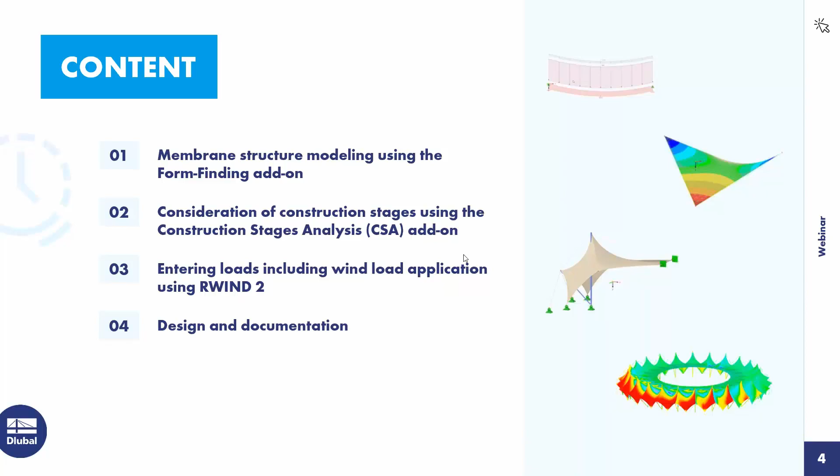Okay, thank you, Andreas. I take over and start with the technical part of our webinar. Today I want to show you how we can deal with membrane structures in our new generation, RFEM 6. For this we planned four main points we want to show you.

First, how you can model form-found shapes and work with them in the program. Then how we can organize these shapes relative to each other with stages. Third, how we can create wind loads according to CFD analysis on the structure. And finally, how you can design and document such types of structures.

Of course I can't do this completely for one project in one hour, but I want to give you an idea how this works. You see on the right side some pictures from top to bottom.

Because the new generation has a new input concept for these tools, I want to explain it on a simple example with a cable at first. Then we go to a hypersail surface structure, and afterwards we use all these functions on a more complex structure, a stadium segment, and finally we take care of wind simulation on the complete stadium model, which you see at the bottom.

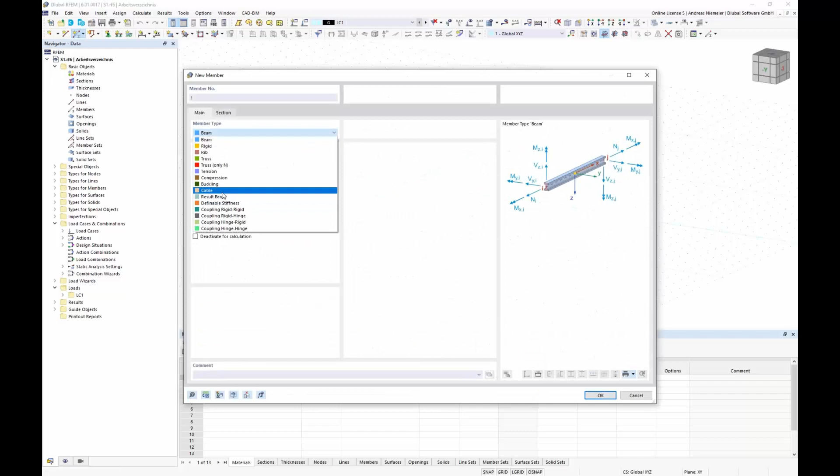As mentioned, we will explain all new features on a small, easy example. I selected a cable example, so let's model it. I use a new member type, cable, with a cable cross section.

Let's select one from the library, for example this PE cable with a PE material, cable material with the equivalent stiffness, and define here a cable with a length of 10 meters between 2 points. So that the cable will not fly through the air, we of course have to define some boundary conditions, so I define 2 supports.

Now this is the input for the model, a simple cable, and on this structure we'll explain all the features. Of course, what I always do when I explain form finding, I calculate the deflection of this easy example.

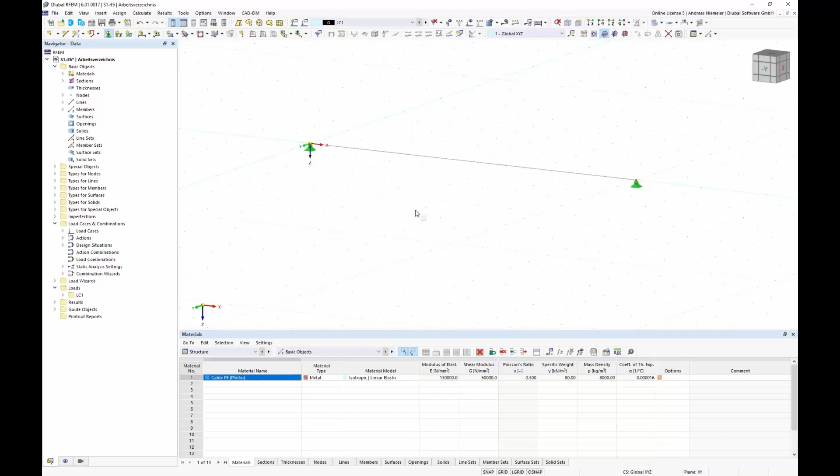Let's calculate the self-weight load case, which is always defined automatically in our program. If we run the analysis of this load case, we will get from the program, as expected, a deflection curve. Here you see 66 millimeters of sag.

Of course we can deform the sag manually, or let's say scale it. We can animate it, and when I scale it to 1, you will see that the deflection curve will lie on the topology shape.

This is maybe the first point I want to mention. In our new generation we have programmed an intelligence that draws the topology, the cable structure in this case, on the deformed shape, in this case with a sag of 66 millimeters.

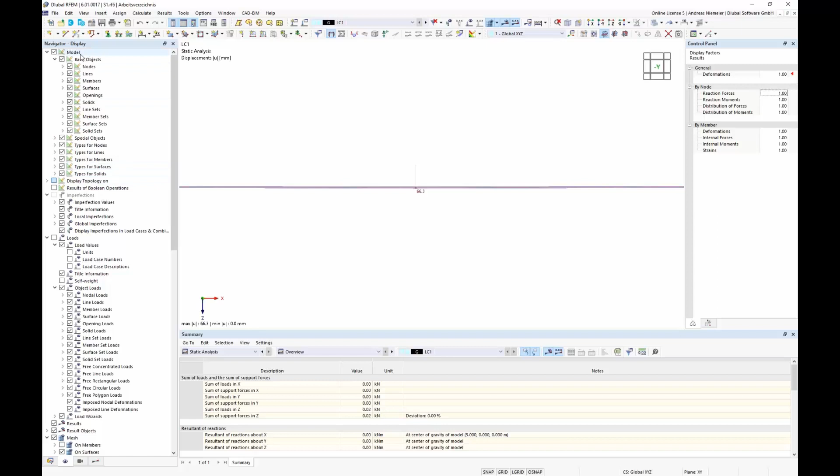You can change this in the display navigator below the chapter model, showing topology on original shape and deformed shape. The same can be changed here with this button, original and deformed shape. So this is a small change that should help understand the model a little better.

Next topic: of course we calculated now the static analysis with the length of a cable of 10 meters and for the self-weight of the cable itself, which ended up in a 66 millimeter deflection with an internal force of maybe 0.33 kilonewtons. But of course it's a too small cable moment.

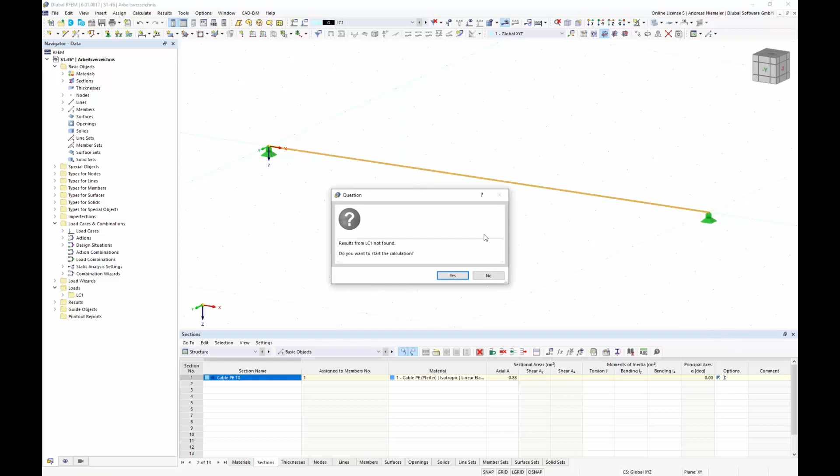Let's make now, because to show you the effects I expect a bigger force here. Yes, 1.25. But of course if you see the force here, you could say I want to simulate in the program a cable with a longer length so that I can reduce the normal axis force here. And this is possible with our form finding application.

For this you have to define, besides the self-weight load case, a pre-stress load case. I call it P and define here an action category pre-stress. This is now the step in our form finding tools. This pre-stress load case is empty and should be filled with some boundary conditions, which we can fill with the boundary condition for form finding.

We can go to the member loads, to load type, form finding, and define here, for example, a geometric definition that we expect for a specific load a sag or a cable length of, let's say, 0.2 meters. If we apply this load, it looks like a line load or whatever, and it indicates that we get 0.2 meter sag.

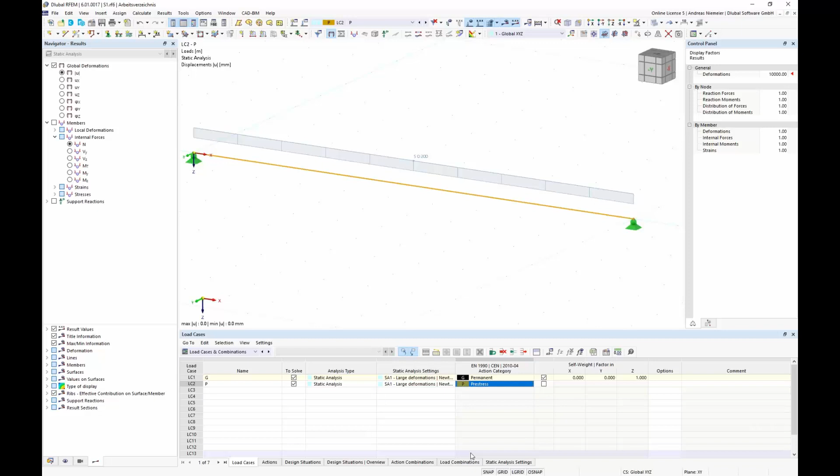If I say for this load, I have to go to the load combinations and define it. For this, I deactivated first the wizard and go to the load combination and say, please combine form finding with self-weight. This means for the program, because this combination 1 contains only this form finding pre-stress load case and any other load case, that this is a form finding job for him. If we run this analysis, the program searches a shape which fits to the conditions.

It means he searches a shape where he can fulfill almost this condition of 20 centimeters with a corresponding force. Of course, you see here we don't meet the target completely. We have 213 millimeters and not 200, but this is a cause of accuracy, maybe the standard definition for a specific size of model. If you want a more certain result, you can change the properties of the calculation.

This leads me to the next feature, how this is organized in RFEM 6. We changed to the properties, and you saw we calculated CO1, and every load situation, maybe load combinations and load cases, have here a static analysis setting. This means I can assign to every analysis or load situation a set of calculation parameters, and these calculation parameters have also a form finding sheet where I can define these settings.

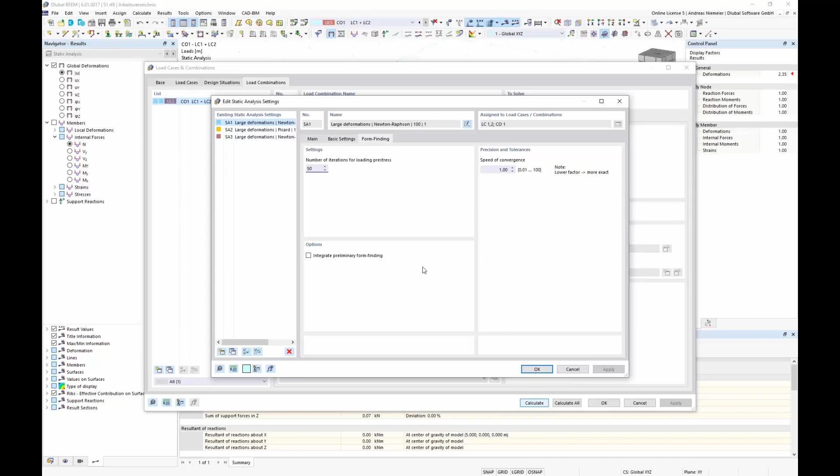You see there are fewer inputs. We simplified everything a little bit, and I increase now the pre-stress loadings to 50, and after confirmation and rerun we will get the 20 centimeters hopefully, and yes, we get it. So you see the program searched us the shape of 20 centimeters with a corresponding force of 0.4 kilonewton.

So far this was our first form finding job in RFEM 6. And maybe you saw now that we got, or we gave you as users, a new mighty power in the program to work with shapes.

In difference to our old solution, we can now manage more shapes in one model because I have it now in hand of combination. Before it was only one. This means now, if you imagine, this is shape 1, form finding 1 is G plus P.

And you say, I want to check in my model also another shape. Maybe the shape should base on a punctual load in the middle. So let's define a load. I call it N, and give this load case the type permanent. And define in the middle here a concentrated load with the size of 10 kilonewton in the middle of the beam and place it here exactly.

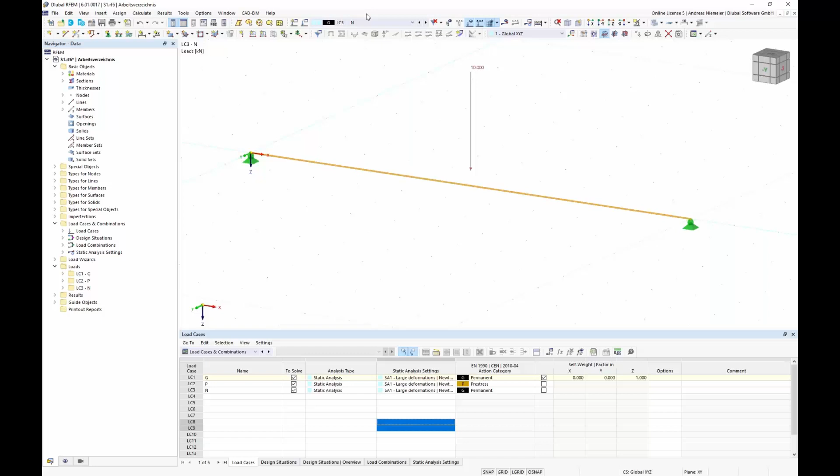Now let's create a second parallel shape besides this self-weight based shape. So I go again into this load case and combinations dialog, into load combinations, and create a shape, maybe FF2, based on N plus P. For this, we only have to change the input, so P and N, in difference to the first one.

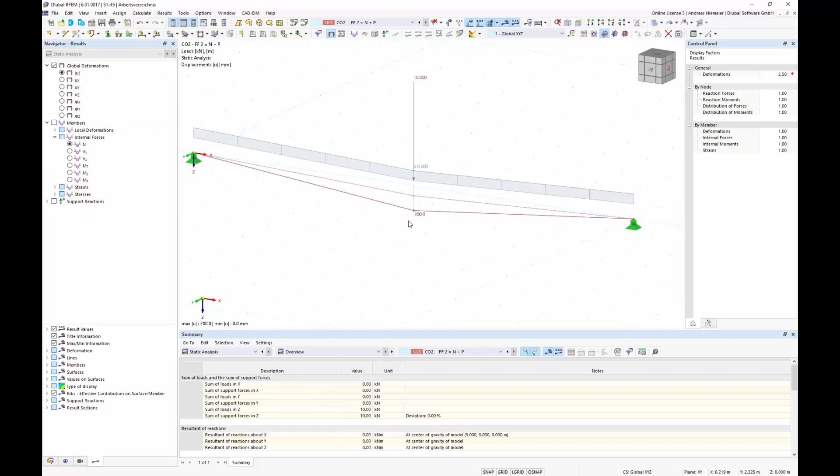And if we calculate this, you will see you can do in the same model another shape. What means we have the 200 millimeters in the middle, but if we take a closer look, according to this form finding load in the middle, this concentrated one, we get such a triangle shape with a corresponding force. And you can change in between both shapes. So this is now possible and gives you much more options to check your models or to create something new.

So this is one point what I want to show you. The next point was, and I remember too many questions on support, how I can deal with partial safety factors in the program. Do you have a solution for it? And with the new generation, we want to give you a solution.

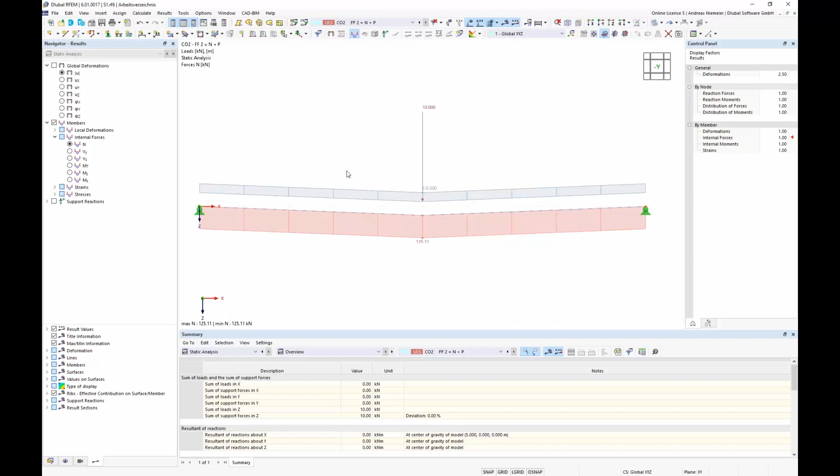So of course we can create a third shape. For example, I copy the first one and say let's scale it up and define here 1.35 as factor. And, that we have a clear name, 1.35g plus p. And if we calculate this, the program knows I have to do a form finding with the form finding condition of 20 centimeters.

It was not scaled up, but with a bigger surface weight load scaled with 1.35, therefore we get a little bigger force on the cable, not 0.4 but 0.56. And you see the program is ready for this.

Of course, we can also scale the pre-stress. What means if I scale the pre-stress 1.35, and only for the name here, 1.35 form 4, for example - this was form 3, only that we have a clear description - and calculate, then we can also scale the form finding inputs. You see not 200 and 270, what is the factor 1.35 in between, with the corresponding force again.

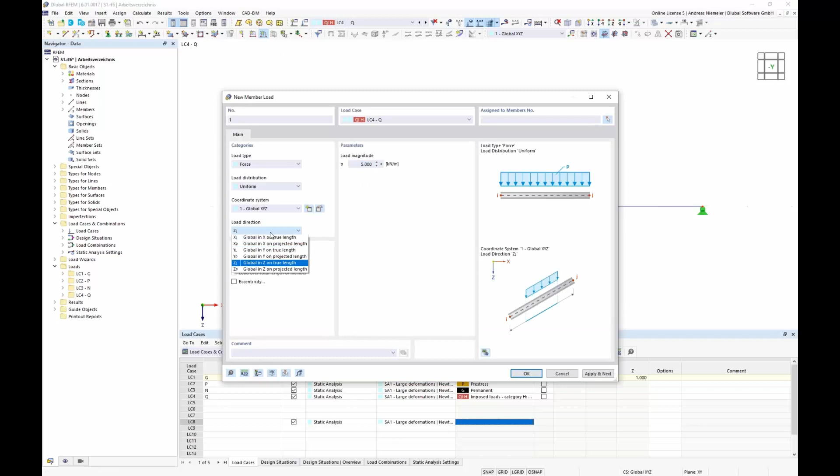So define at first some additional load. I define here, for example, a variable load with any category. Let's take this red one. Now, apply, for example, 5 kilonewton per meter on the structure here with a projected load. So far we have a load on structure. If I run this load, what happens? Without any further specification, the program applies this load on the 10 meter long cable, and not in any shape.

But if you want to apply it maybe on shape 1, you have to assign it. This means we go again into this dialog, load combinations, and say, please calculate - we give a name, Q on FF1. And this you can do if you define an initial condition or an initial state. So here you specify the shape, for example shape 1. This means we overtake the geometry of mesh and the inner forces, and to get a full set of calculation we apply also the outer loads.

Form finding loads and the expected additional load. And now, according to the situation that we have here defined an initial state as starting shape, the program knows that this is not a form finding job, only a pure static analysis job. Let's calculate this and take a look how this is looking. And you see, when we take a look at deflection, we have now a deflection of 629 millimeters, starting from the original shape.

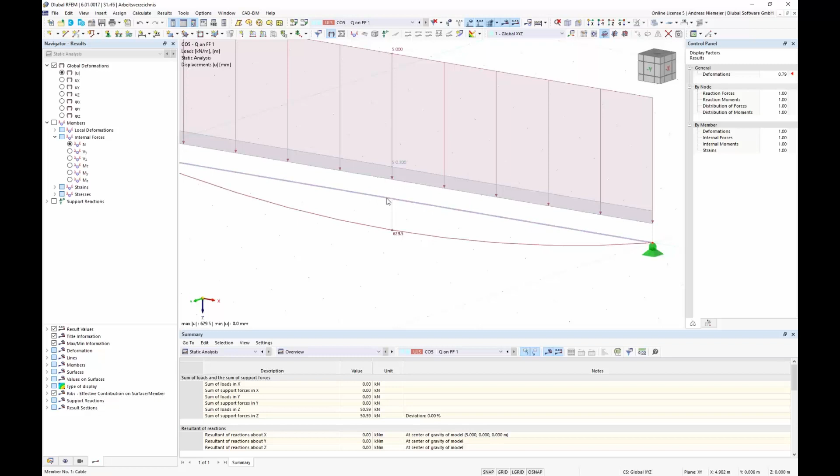So this is what we inputted. This is the shape of initial state. This is our form finding shape, and this is the deformed shape, the loaded form finding shape.

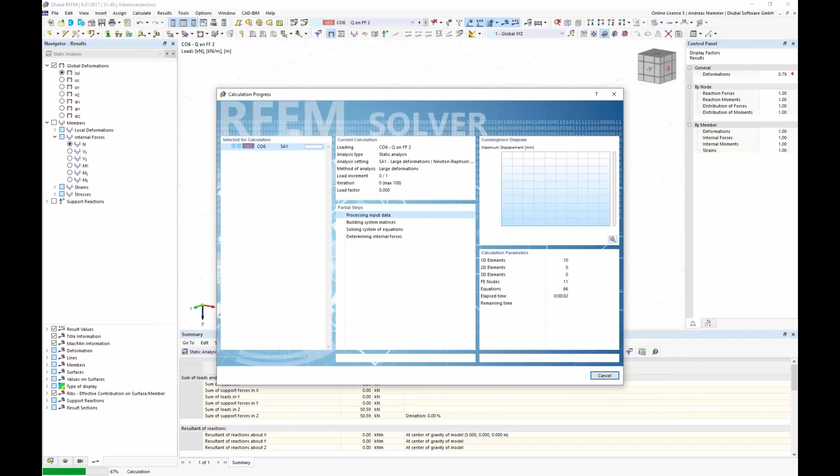The program gives you the option to manage all this stuff, and not only for one shape. If you wish, you can also apply the same load on shape 2, which means we only change here to shape 2 and exchange the load to N. With calculation we get the same task, but now on form finding shape 2 plus load on deformed shape, with 493 millimeters and a normal axial force of 177.

So this is our new philosophy of working with form finding tasks and organizing it in the program. This brings me to the next point: how we recommend the standard use of these tools. If you're starting a new project, you don't want to test it like I just showed you.

On a real project I recommend, and for this we create a new situation. I delete all this stuff, go back to load cases, and remove this. Now we have these 3 load cases: a standard situation.

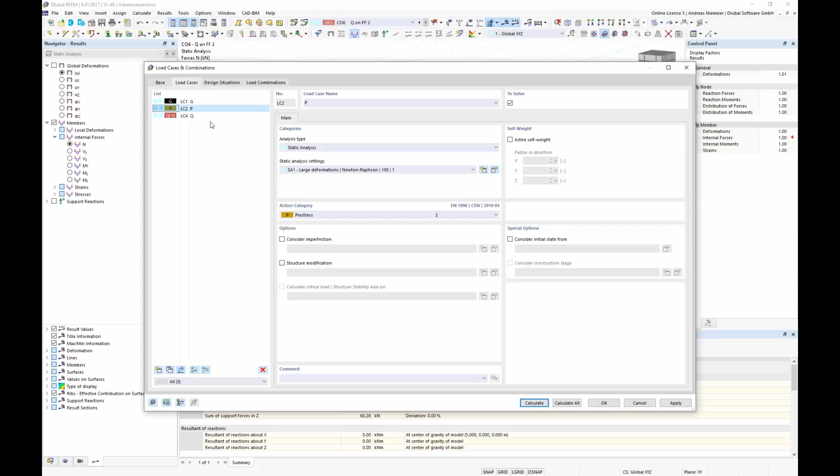In a standard situation I recommend that you use this with the combination wizard, and say: please combine all these load combinations automatically. This means the program takes over all this, but it has to know what my shape is. To define the shape for the program, we create it here as an individual load case.

So we select both, for example P and G, add it, and say this load case is shape 1. Now we give shape 1 the pre-stress load case.

Now you see we have 2 pre-stresses in it, but we only need 1. So I set my action, pre-stress, that this is shape, it's not needed, we only want a combination with P, and go to the design situations and tell our combination wizard: if you combine something, please always consider shape 1, or any other shape.

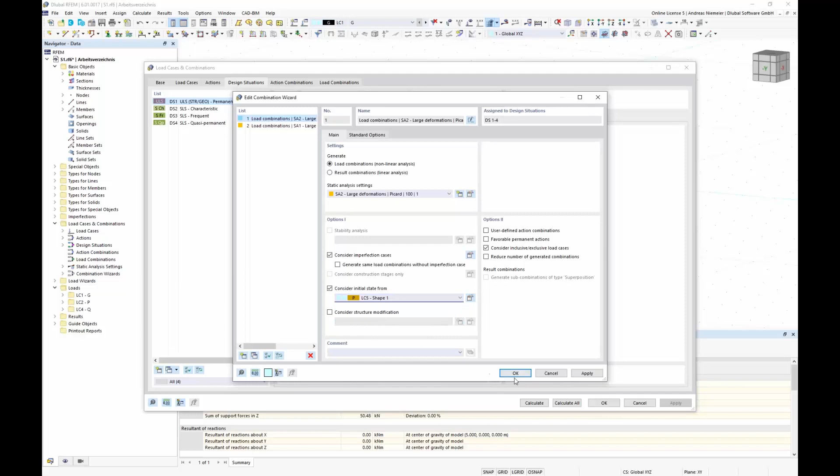Of course we have to use Picard so far. Now if we go to load combinations, you will see the program combines for us all combinations according to the rules of standards, so ULS and SLS with factors and without factors, and you see shape 1 is automatically assigned in all combinations.

And even here, all load cases, the external loads, are also placed in the combinations. With calculate all, you get all forces expected in this case. First it calculates the shapes, and then it sets it up.

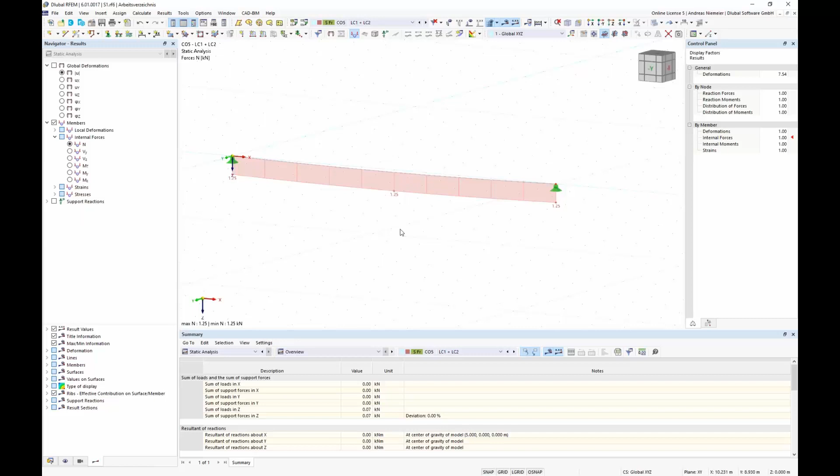So this is maybe the first introduction example showing you how to work with all these tools in RFEM 6. Of course this is a special example, because the shape for cables

depends always on the form finding condition, so how big is the sag, for example, plus any load for which we have to detect the shape, the self-weight for example. But there exist different examples. Maybe the next is here, a surface structure, a membrane structure.

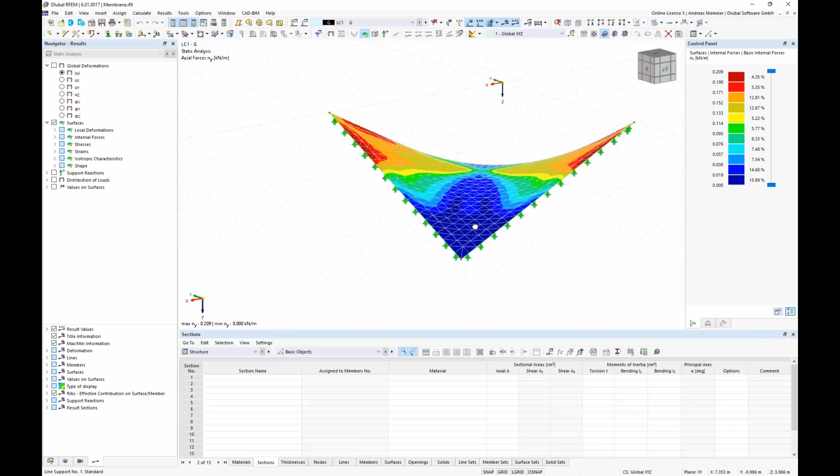I prepared this example only to show you it could also work like this. So in this case we have maybe such a sail with typical load cases: self-weight, pre-stress and snow load. For self-weight, that's the weight coming from the material itself.

For pre-stress, we defined here the inner pre-stress, the membrane tension, by a surface load, like we just did for members, with load type form finding, defined in X and in Y as 3 kilonewton per meter. And you see, if you run this form finding job, you get the shape of the membrane, with internal forces in the membrane that almost meet the defined 3 kilonewtons.

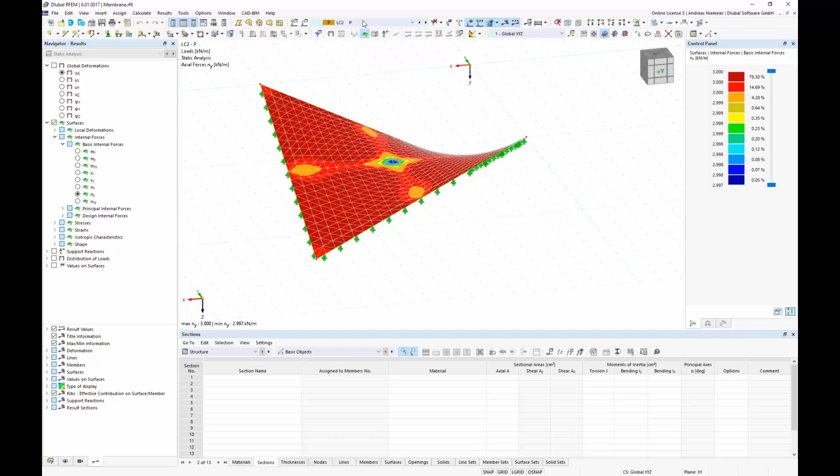If you want to combine all these 3 load cases in combinations as a standard recommendation, you go into the load case and combination menu, define the combination wizard setting, which is on by default, and set the wizard: please always assign the initial state, the shape from load case 2. Not more, in this case it's enough.

And if we go to load combinations, you see the program assigns us, even for this surface structure, this shape from load case 2. If we run the analysis, the program uses this shape and detects the forces. As you see, if we go maybe to the characteristic solution, we have here shape plus self-weight.

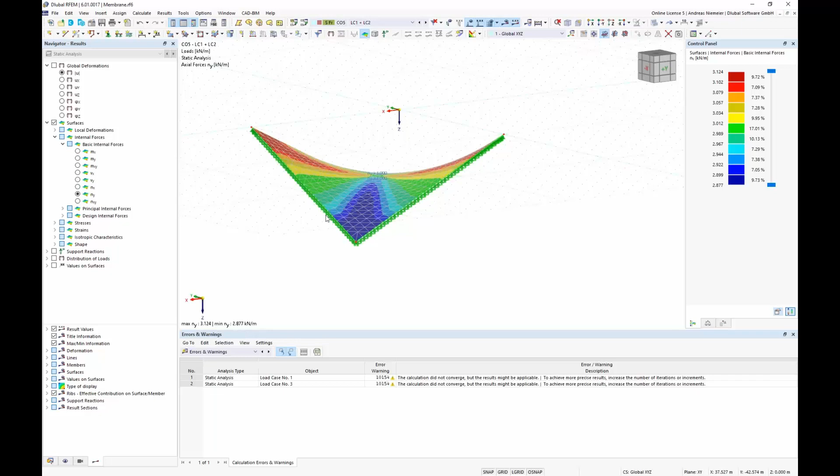It's not almost 3 because self-weight is applied afterwards. And if we apply the snow load too, you see the forces have bigger changes because the load has an effect on the given shape. So even this type of model is possible in the new environment.

And now we learned that we can use pre-stress load cases with form finding loads to find shapes, to organize shapes, to assign shapes to load situations. I want to go the next step and say it's even possible to use shapes based on another shapes. And if you have such a task, then you can also use RFEM 6 for it.

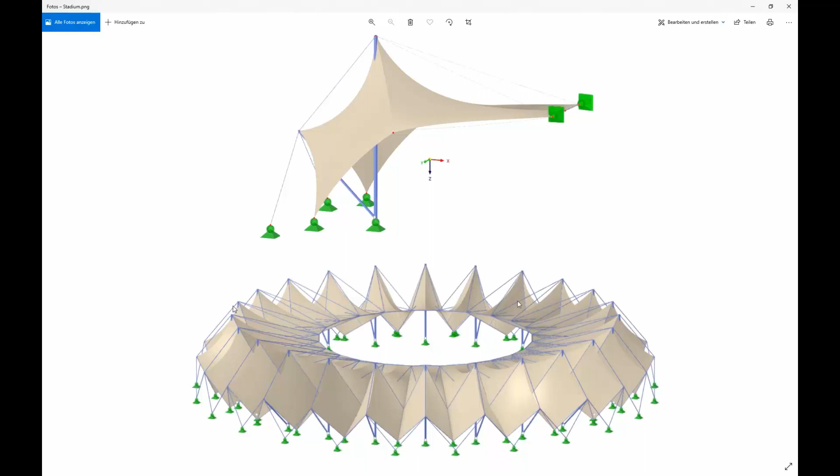We model this part, and afterwards we go into the stadium structure. So let's go back to RFEM and open a new model. I call it S2, and define all tasks what are needed for modeling this part of the stadium.

I go to add-ons and say please use form finding. And because we have these different stages, primary and secondary, I activate construction stages and go in. Of course it exists, so override it.

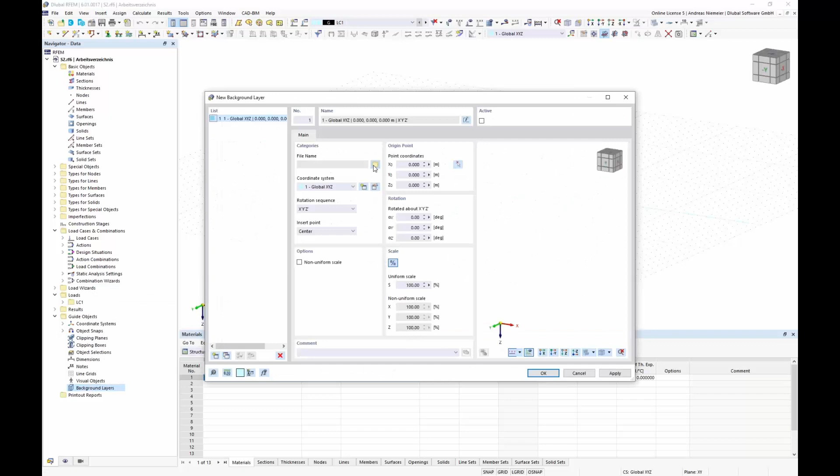Now let's start. Of course it's not easy to model a whole stadium or a fragment from it, so I prepared a DXF background layer. I go to background layers and import here a layer from a DXF file called base.

And you see this is my DXF data. It's on the wrong plane, so I rotate it 90 degrees and then by 180, and then everything fits and we can overtake it. Please take care that it's activated, so active, and now we have this basic geometry in our program. You see on the bottom there's a tribune only for imagination, and then you see here this main elements is for primary structure, and then the membrane for the secondary structure.

At first we model the primary, take a look, and then we add the secondary part. So let's start modeling these members. I go to the member dialog, member type beam.

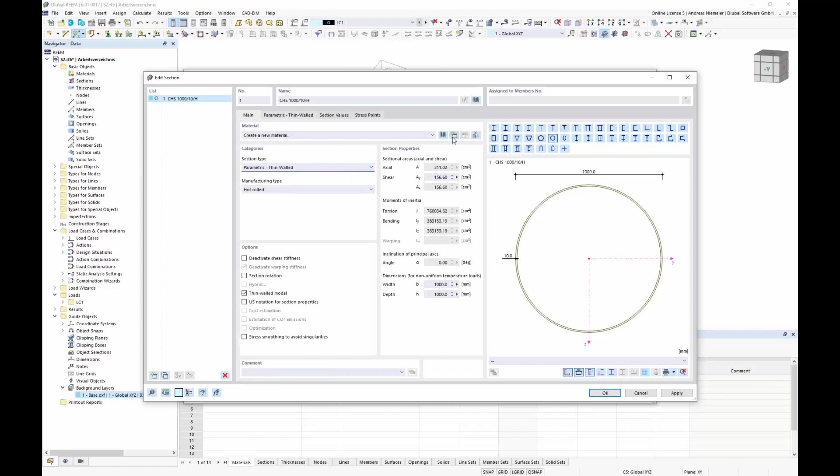Let's select a section. In my case here, because I don't move the section, my proposal is not the final state, but here I would select a diameter of, for example, 1000 millimeters with a thickness of 10, and a material of maybe S355.

So let's go to steel according to Eurocode. Select here standard according to Eurocode, this one, and select the steel here and go. And now we can place this column here in the structure, so from the bottom to the top.

And let's add here a bracing member what is connected hinged on the bottom, so if I activate the hinges, and here you have a different cross section, for example 600 millimeter diameter with a thickness of 10. Of course this could be optimized according to the section proof afterwards.

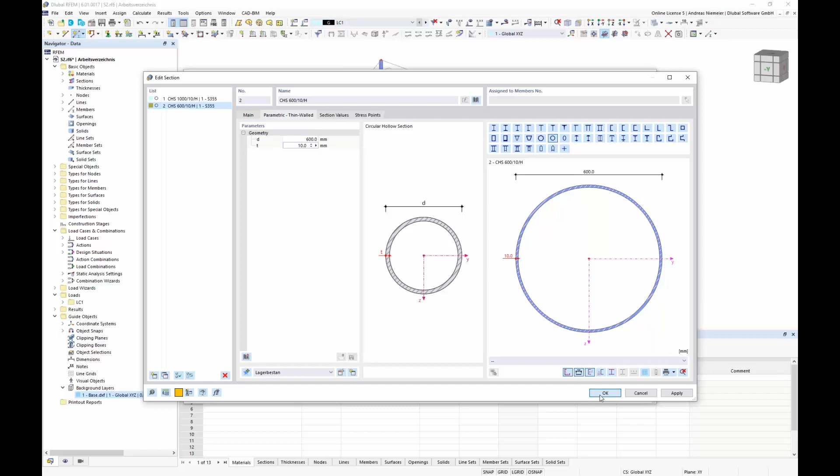So hinges should be hinged on the bottom, so define here hinges about Y and Z, and now we can place here the member between these 2 points.

This structure will not be stable, so we have to use now stay cables on it. The stay cables are acting now on the outer fraction of this segment. At the moment it's only a slice, but it will be a 15-degree segment, so we have to create it.

For this we need a center point of our structure. Because I know here the diameter of the structure is 288 meters, I copy this node 144 meters to the middle, and this is now my center for all rotations.

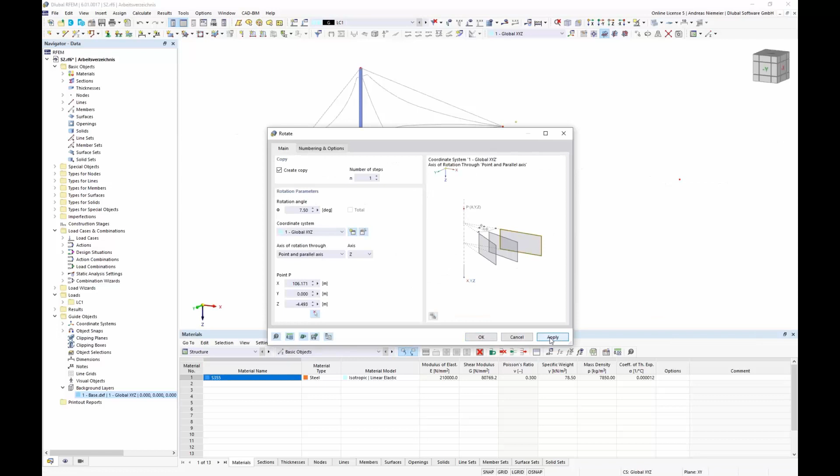And we can create from these nodes now the outer points for this segment. So I select these 3 nodes, rotate it by 7.5 degrees about the global Z-axis around this point, and apply, and now minus 15 degrees and OK. So now we get these outer nodes. When we take a top view, you see this is maybe the geometry of this 15-degree segment. And now we can place the cables, which means the uninteresting nodes we delete before.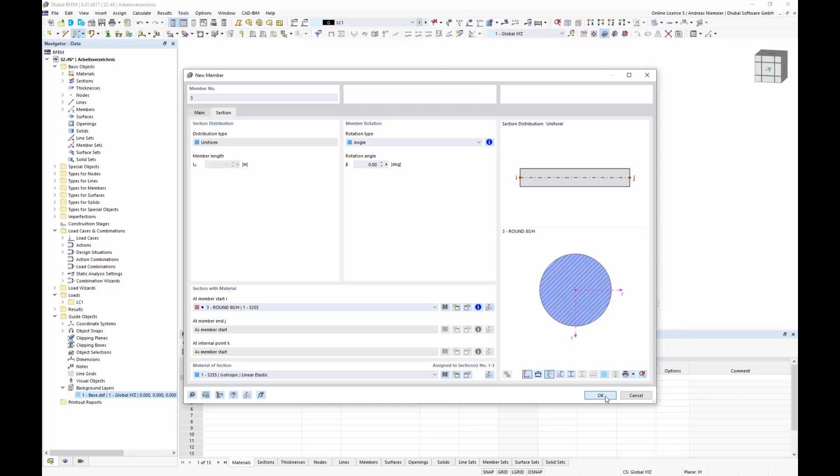Go to the new member function, use a cable, and now select equivalent sections with an equivalent stiffness. For example, here a solid section with a diameter of 80. So now we can place it here and here, and now to the top.

And now we need maybe some suspension cables to the front. Here we have a different diameter, so it's a cable at least. We use here a solid section again with a 30 millimeter diameter, and then we can connect maybe the peak point or top point with the front points, and maybe make some stabilizing cables back to the back bracing. So this is almost the primary structure for the stadium segment.

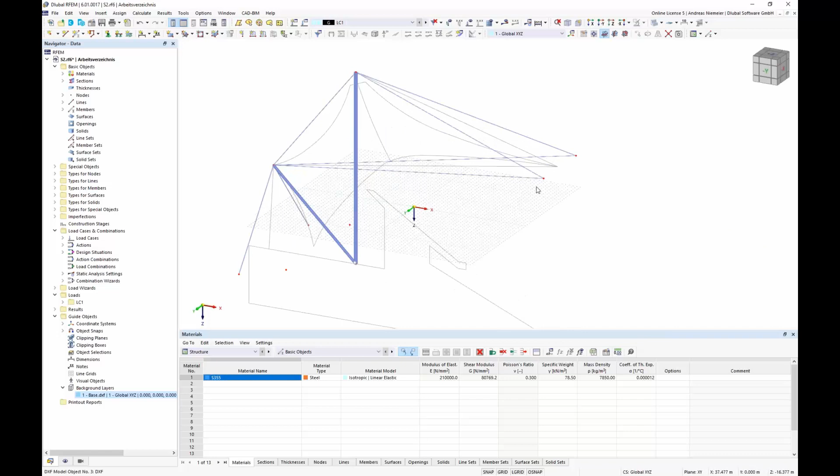The only thing that is missing is the tension ring around the structure. Let's add it. We take here a cable with a section, and maybe here need some more mass, for example 120 as equivalent section, and connect both points and directly define here a middle point, so divide the member for a later connection of the ridge cable. So this is now everything I have to define for members for the primary state.

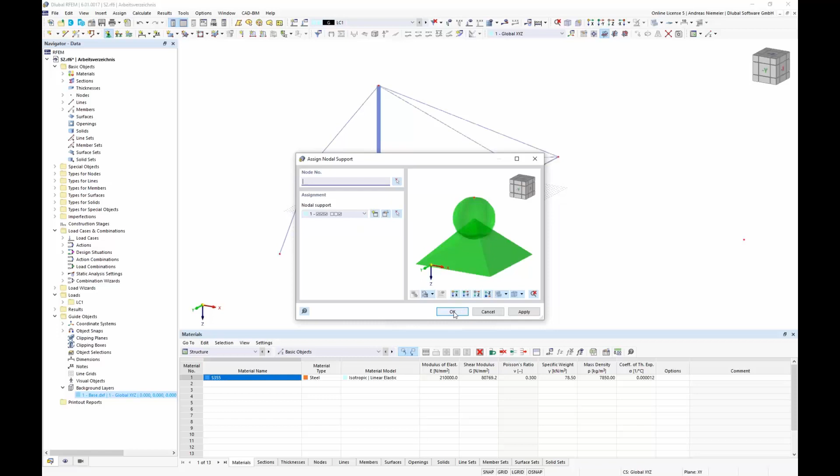We need a rotational symmetric boundary condition that is overtaking loads, so I have to simulate this tension ring around. For this I use also nodal supports, but I rotate them in the running direction of the cable, which means I fixate the degree of freedom in UY direction with a specific direction around 7.5 degrees.

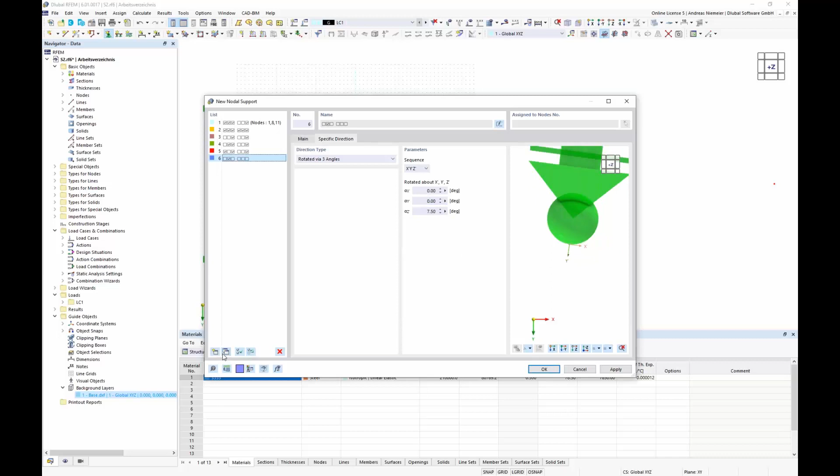Now let's copy it so we have it also for the other direction, with minus 7.5. And now we can start applying this support here, and the same for the last direction, and we get a structure that can simulate this tension ring. So the structure itself is now ready.

The only thing missing is the form finding conditions to find the right shape for this structure. And if we want to do something with form finding, we already learned we need a load case pre-stress. So this is G, permanent load case, and here we need a load case P, pre-stress, for defining these form finding conditions. So let's do it like this.

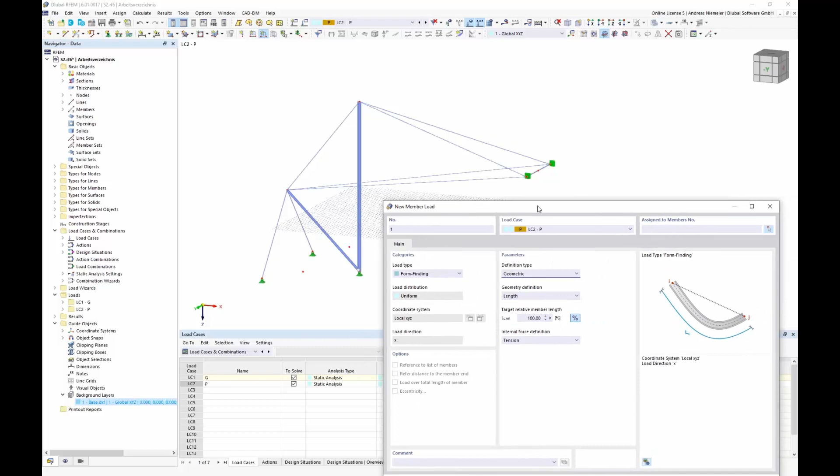This entry is done, and we define here with member loads, type form finding, geometric definition. You see we have different options here: geometric definition, force condition. But in our case, in this type, generally he should find a shape with the original length of the cable. So I define geometric length by 100% and apply this on all cables.

Now it's done, and now we should do a combination of both loads, because you have to find the shape according to the self weight, which is clear. We did this before with a load combination, but now we expect that we have a shape on another shape, so we have to organize shapes before, which we can do in the construction stages.

In the construction stages we can define now a stage, let's say shape 1, it's easier to understand, and we say shape 1 consists of members and nodal supports. The members, I draw a window about everything, okay, and the nodal supports the same. Everything good so far. So the amount of elements is clarified in this stage.

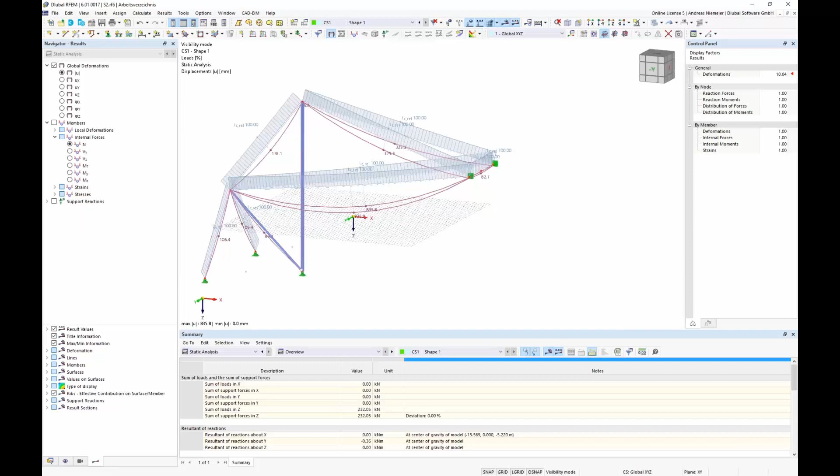The only thing missing is that the program knows it should do a form finding for this stage, shape 1, which means it should consider these load cases as permanent. And if we calculate this stage with this load selection, it's clear because nothing else is here, he can do a form finding for this type of structure. We get small sags, we get forces, so everything is clear so far.

The next point is to hang in the membrane, what I mentioned before. So if we take a look at the background layer and set it here, you see now we have to bring in the membrane on the already deflected and loaded shape 1. To do this, let's say delete mesh and start modeling the rest. That means we define, for example, the boundaries of the membrane.

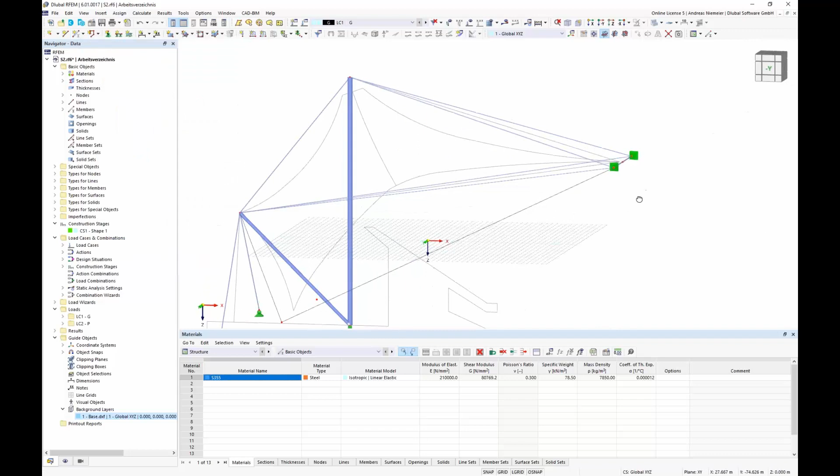It's maybe here, running to this point, and even from here to the top. The only problem is now that I have to specify that the cable is not running in the other one, so I rotate my grid point plane and use some arc lines to cover this.

I simplify this right now for this presentation and pick the line, same for this here. Of course, it's not important if this line matches the DXF shape, because the form finding application itself will find the right place of the structure. So it's not a target, it's only a tendency where it should go.

And now, not completely, we need here a splice cable, so also define here a splice. If we want to define it on the perpendicular point, we can do it like this. Now we can deactivate this shape.

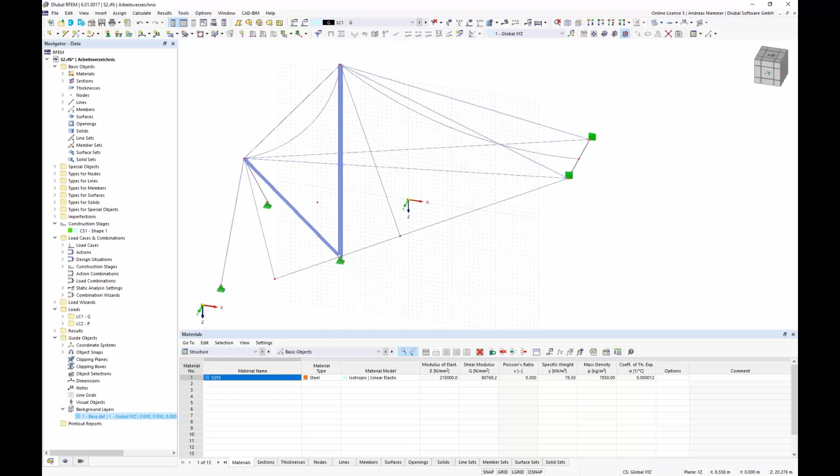You see we specified the boundaries for the membrane and can support cables on these boundaries. So I select all these lines, go into the library, edit lines, and say these lines should hold some members with the type cable, and now define the cross-section, for example one with 20 millimeters. So far it's good, and now we can maybe bring in some membranes in these cable boundaries.

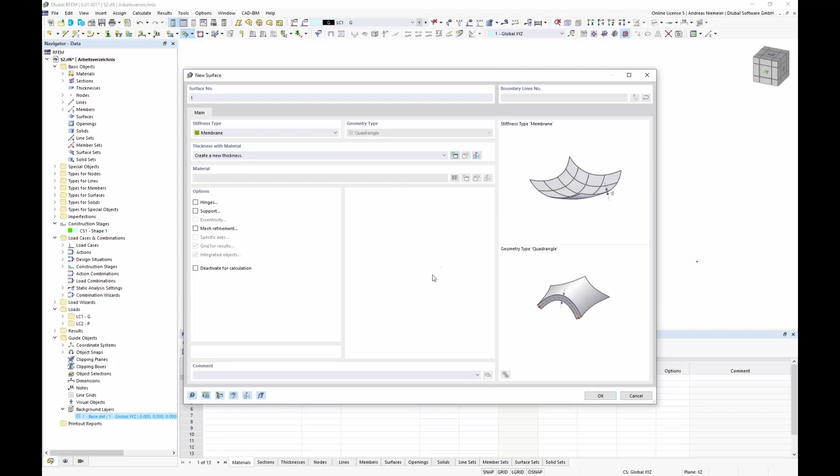Because this produces some non-plane surfaces, I select as initial shape a quadrangular surface with the type membrane, and go to the library. This is maybe new: in the library we now have defined fabric material, standard materials with an average set of values of stiffness. For example, we use here the glass PTFE type 3 option.

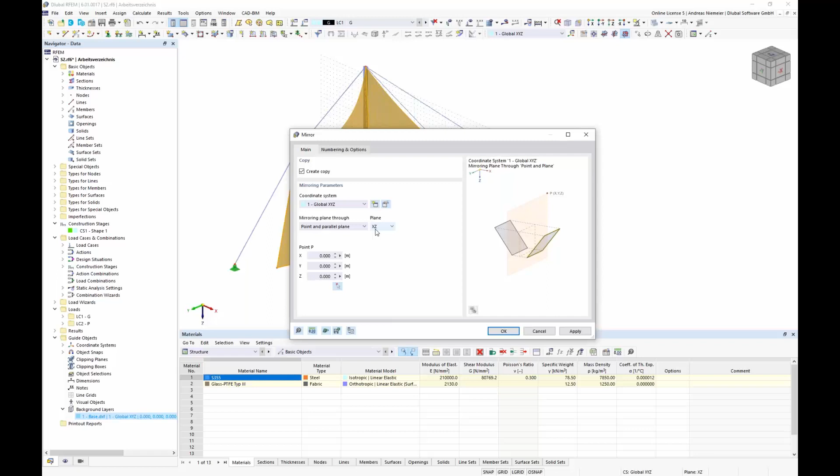The program knows, according to the defined stiffnesses, even the reference thickness of 1 millimeter here, and now we can place these surfaces in between these cable boundaries. If we take a look at the transparent view, you see the definition is now made, and now we only have to mirror this stuff on the other side. So use the mirror function, create a copy about the XZ plane in the middle, and go.

So all this is done, and now to finalize all this stuff we have to take care again about boundaries. One type of boundary is clear: we have to fixate these lower corners here, and we still have to check that the rotational symmetric support is working for this 15-degree segment. This means we have to support these boundary lines.

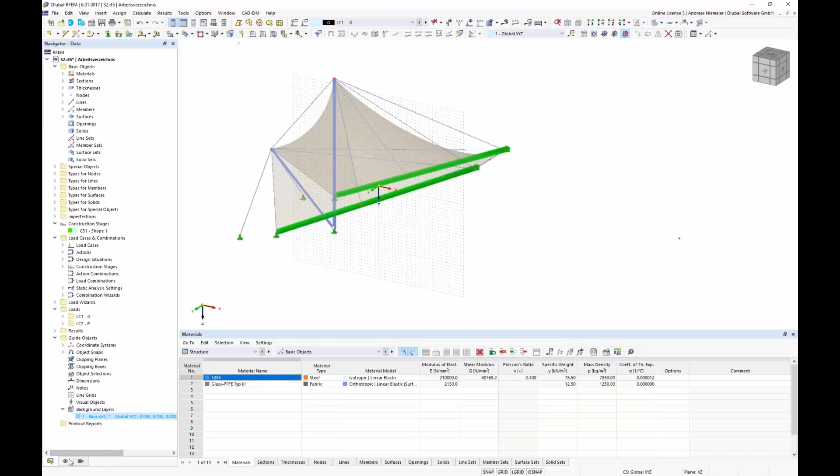So we use here line support on local axis in local y direction and pick these lines here. So far this is done. This is a fat green line, I don't like to see it all the time, therefore I deactivate it with type for lines in the display navigator. And now the last point is to specify even form finding topics.

So we want to pre-stress the membrane with a tension load. Let's go to surface load, type form finding, and we can define here the method of application, standard or projection, force or stress, and we say, for example, we have here 2 kilonewton in x and in y direction, and draw it above the model.

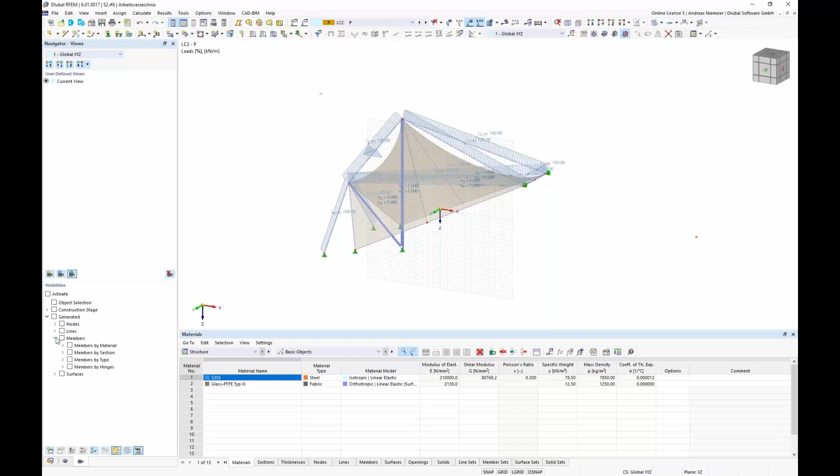So this is done, and now only the last final boundary cables are missing, and now I see so many loads I lost my overview. If you have the same situation, please go to visibilities, generated members by section, and activate the last one, and you see these members are left, and we can go to member load, form finding, and can select the definition.

So geometric you already saw, but we have also force options, and here you get also some more options for shapes. In RFEM 6 you now have the option to place an average force, maximum force, minimum force on member, horizontal tension component, a tension at start, at end, a minimum tension at start and end, force density. So there are more options than in the old program.

We use now average force with, for example, 100 kilonewtons, and draw this stuff over the structure, and you see the loads are set. So now loads are defined, boundaries are defined.

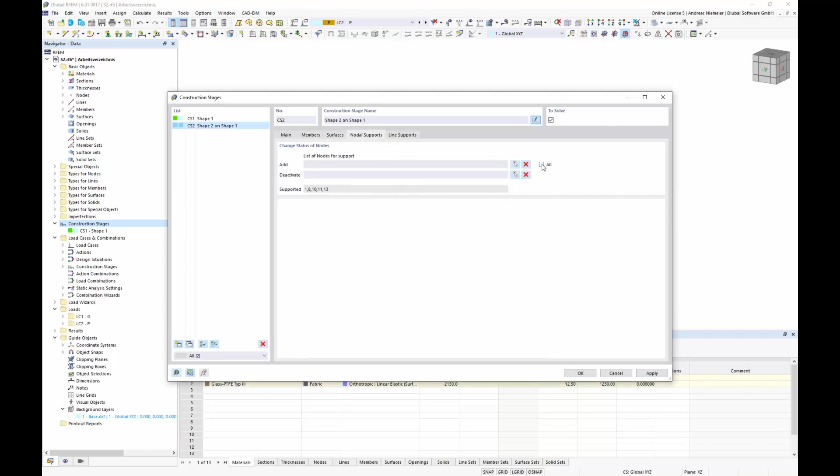The only thing missing now is that the program doesn't know what is my secondary state. So let's specify it in the stages and say here, please create a new stage, and we call it shape 2 on shape 1. And for this we say, okay, please consider also surfaces, please consider also line supports, and because we know no more elements will come, we say all, and all. So elements are clear.

So here we know which elements should be considered, and the program knows the loads automatically because stage 1 consists of self-weight and pre-stress, so it's a form-finding topic because it's permanent. The same applies for the second stage because it's permanent. So if we calculate stage 2 now, the program first has to detect stage 1 because it's the basis, and once it has stage 1 it calculates stage 2. So we have a sequence of shapes.

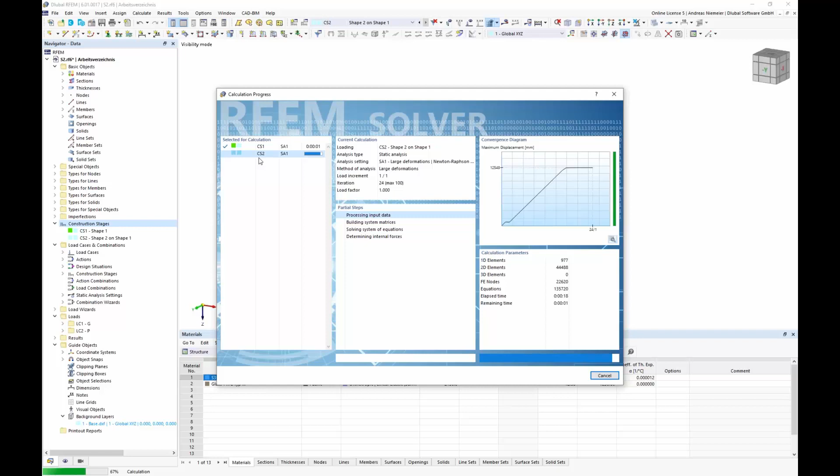This is quite a cool function, I'd say, and gives us much more potential to calculate a lot of structures. Now when the update is ready, you see the shape of the membrane based on the already defined shape 1 with a new set of forces. Of course you can see the forces in the membrane, forces in cables, and it's clear you can change back even to stage 1, which holds only the member structures, and you get only forces on these elements and not more. So there is a pure organization of which elements should be considered and which loads should be considered, and RFEM 6 keeps it open for your definition.

And now if we have a sequence of shapes, the question comes up: where do I apply my additional loads? Isn't that a weird situation, a chaos?

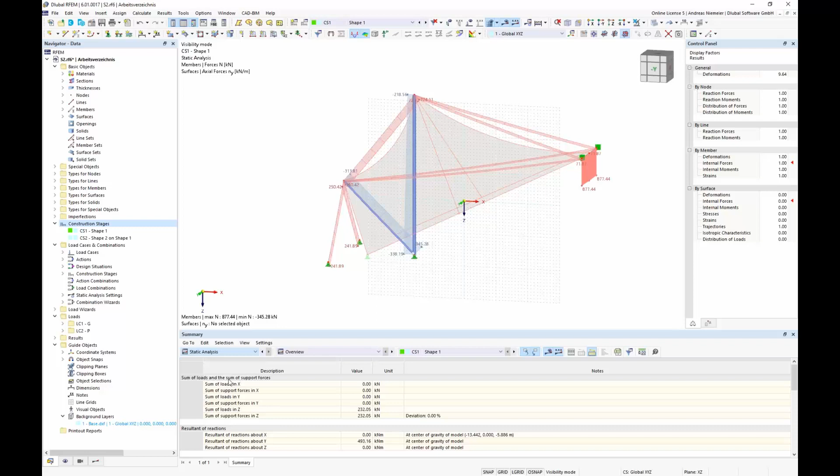No, it isn't. So let's create a live load, and define it here in the load list, for example a Q load, where we select this red one and apply it on the surfaces. So a surface load, force in projected area, maybe 0.2 kilonewtons. And we draw it over the structure, and you see it places the load above.

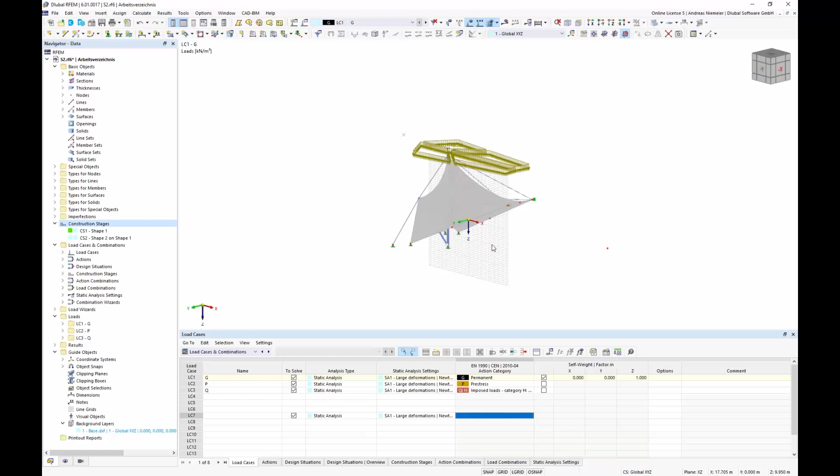The only question now is at which stage this load should be used. We have to go back into the load combination menu to these stages and say, we have to do something first. We have to give the program information about what is now the basis for further calculation. For this we create a last, final stage, and we call it structural calculation, calculation on shape 2. Now we can start assigning loads. This means shape 1 has a start condition, shape 2 is based on shape 1, and stage 3 is based on shape 2.

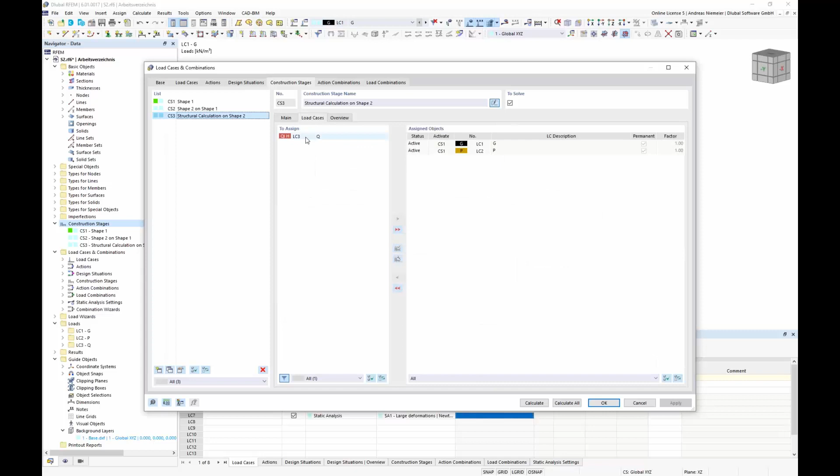And here we say, please consider load case 3, variable non-permanent, in your stage. Now let's say everything is done for calculation, and we pick load combination. The program prepares load combinations for ultimate limit state and for serviceability.

But if you take a closer look, the initial conditions, initial states are not defined, so this is not so good. But it's the same as for load cases - the program has to know for which stage. So let's go back and say, of course we want combinations for all stages.

And the wizard says, yes, I do it for stages only with the Newton-Raphson solver. If we go back to load combinations, the list is a little longer, but now has a stages allocation: stage 1, stage 2, stage 3. Here we have 2 combinations, the same for the characteristic ones. And as you see, we now have stage 2 defined as basis, working on the element set of stage 3, so this setting is pre-filled with all load cases.

Now we can start calculating all. Before that, I'd deactivate these load cases so we don't have to wait for all of them, and calculate simplified a bit. No, actually we can calculate all. So now the program is calculating all stages at the same time - to say it correctly, the program always calculates the load combinations for the stages that are already calculated. So it can't calculate the final combination which is based on a state that isn't prepared so far.

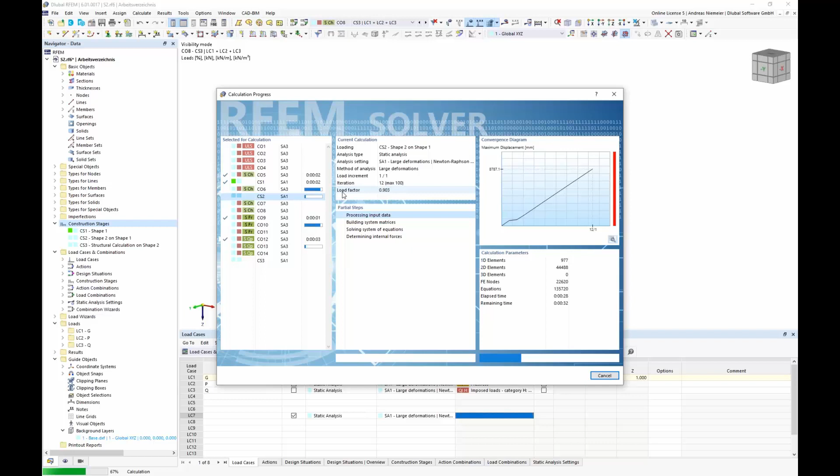So now we have to wait to get the analysis of these 14 load situations based on different statical systems. As you see, there are always 4 processes running on my computer at the same time. This is connected to a solver manager, because the program has intelligence which checks how many processors are available and shares all this calculation work among these processors to get results back, using all the available hardware possible. Of course, it cannot skip over stages in this case.

You can also select every process manually. Maybe combination 1 has a pretty small deflection, combination 2 has a bigger one because the membrane is moving from its origin place to the uplifted place, which is a longer way to go.

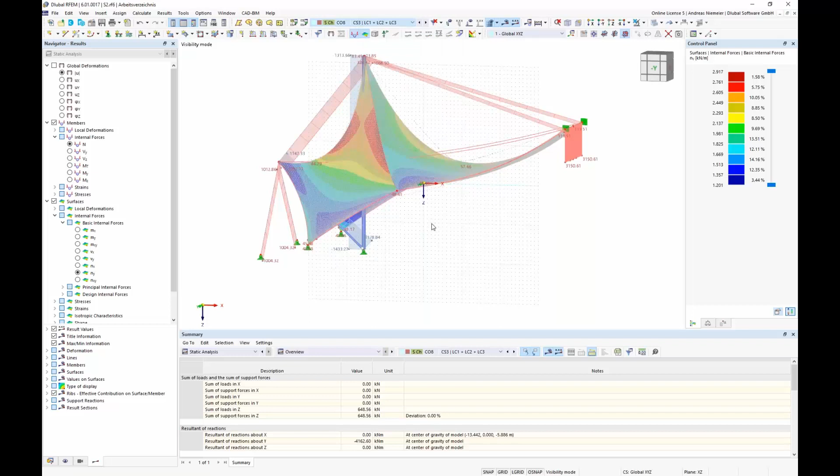Now the results are ready. You may see nothing according to so many loads, but let's open, for example, combination 3, which shows self weight and pre-stress in these different shapes. This is maybe a little bit scaled, but now you can select the different stages with the different situations.

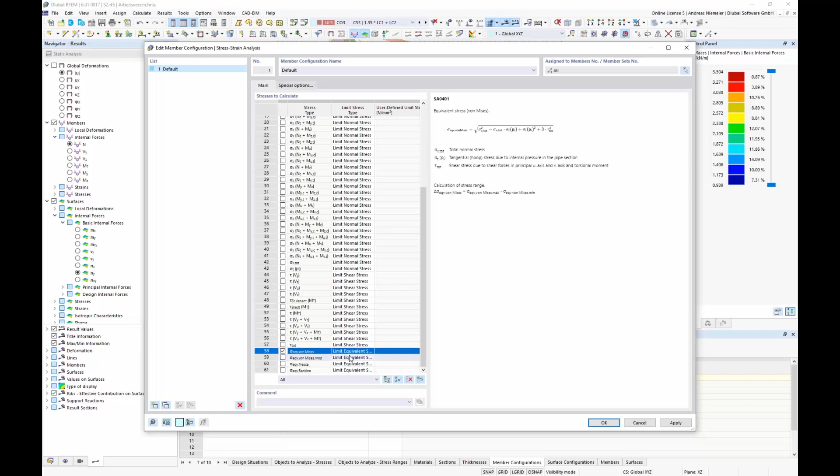This brings us to the stage of checking if the membrane and members are so far okay. For this you can activate in the calculation add-ons the stress strain analysis option, where you can say what should be calculated. For example, for members we say please check for us, and you can select between all these stress components - it's endless and maybe boring. So from my point of view, sigma equivalent is enough, check it against the limit equivalent stress, and apply.

For surfaces you also have the same option. Here equivalent stress is not so good, but you can say please check sigma x and y with a user-defined stress, for example 35, and here also use for example 25. It depends on you what the limit stress is.

Now if you run it, you get a utilization check for all these elements according to stresses coming from all these stages. So now we get a result.

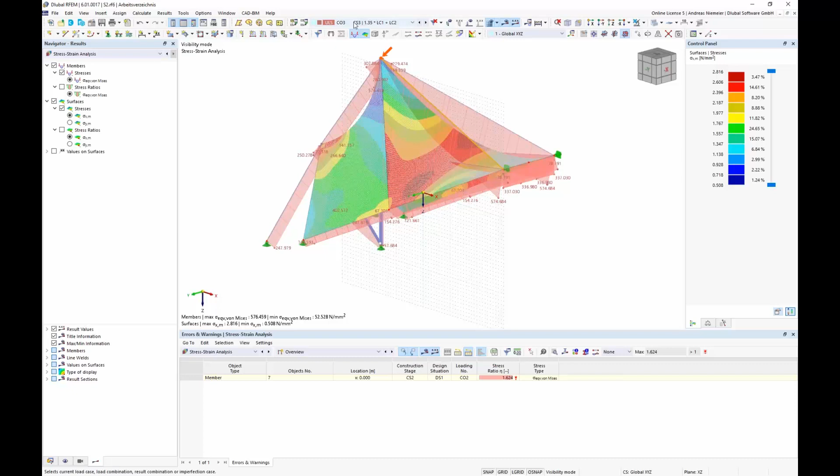Of course, now the nice shape of the form-found shape disappears because this is valid for all load combinations from different stages, so the program draws the shape on the original shape. But this is one point - now you see we get results for members and for surfaces.

Let's deactivate it first for surfaces, deactivate the stress ratios, hide the mesh, make a wireframe model, and you see, okay, almost all cables fit, the rest we have to rework. Here we have some red ones, so you need a bigger cross section.

This could be visualized, and you get also a result table on it - stresses on member, by stages, by design situation, or by section, where you get the table. This one is maybe the limit state for the different cross sections, for example.

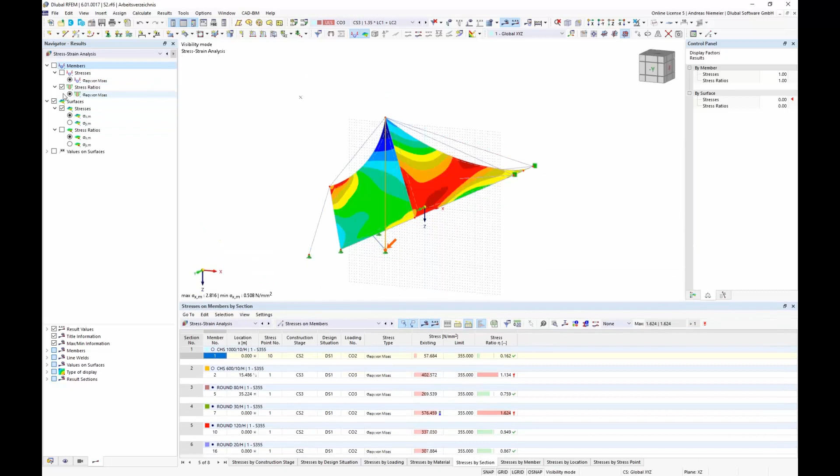The same for surfaces - here we have also utilization, and you see stresses on surfaces. So far the grid points are fine. Stresses by material, by thickness, by surface. You always get a table where the existing value is compared with the limit and get a check or not.

So far, now you see this is the way of design, and if you have to bring all this calculation onto paper, we offer in our program a printed report.

This printed report could be opened here, and of course at first you have to give a scope of what should be everything inside. Take a look, you get maybe all options - basic objects, node, materials. All these topics could be brought into the shape of a table, even the stress analysis we activated.

Here you can say error warnings are not interesting for surfaces. I want to document the table surface by surface number, save it, and show these tables.

Now the program creates a report where we get a sum-up of all input data according to the scope we just defined.

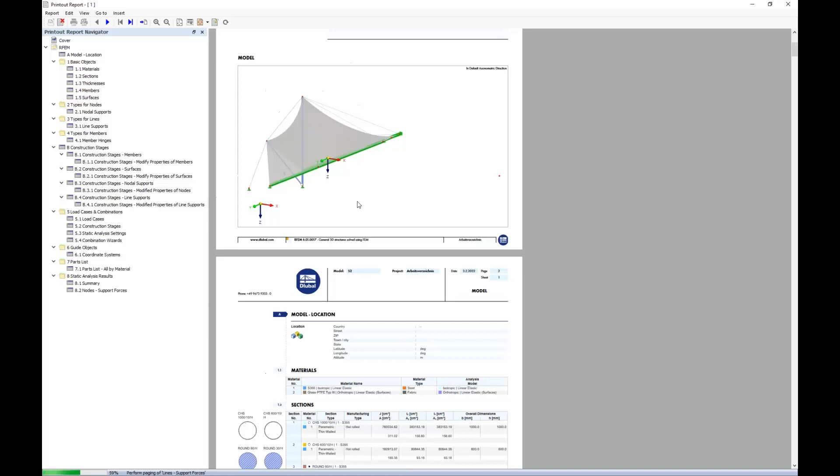It's a styled document where you see a cover, a content list, and also all data like sections and members visualized with nice small explaining pictures, so the reader of the document understands what is going on.

You can zoom it if needed, and of course the results we just looked at are defined here - so here's our list for cross sections for surfaces.

Even this list that we see in the main program could be visualized in this document, and if you are forced to make it more reader friendly, you can add also some pictures.

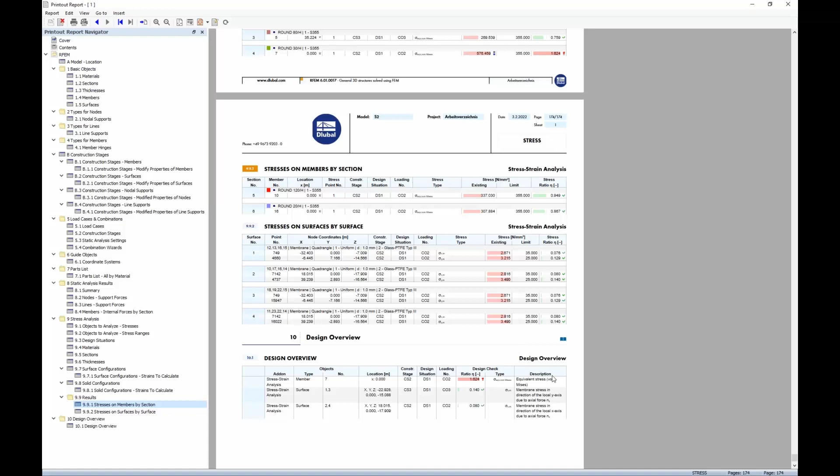So jump back - the menu is opened in parallel, and you can say please print me a picture of the member utilizations into the document, print that report, and say please make me a window-filling picture with a height of 50% of page height, and yeah, okay.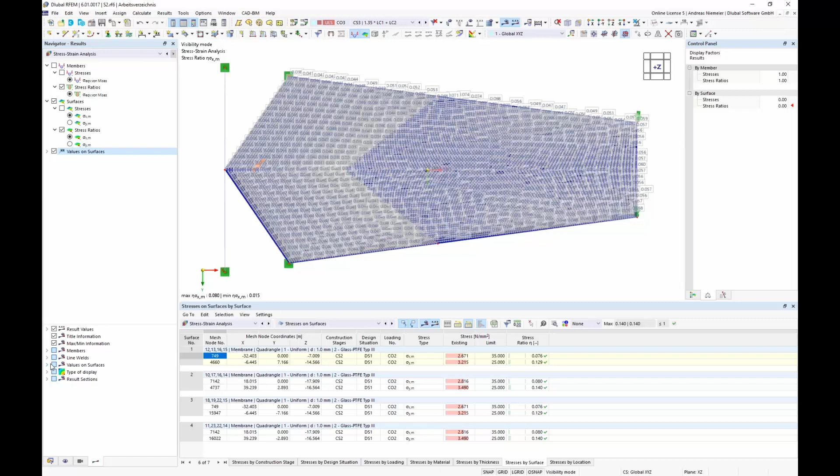Make me a utilization picture of the surface utilization from top view with values on surfaces, maybe with extreme values. So everything is possible, you can create your own pictures as expected, and let's go to print and move it into reports. The same for the Y direction, print it, and if it fits we update the report.

So now the program is updated. You see the pictures are inserted in time, and the process is still running, and we can work with this document. When it's updated, it's regenerated, and you have all these pictures inside. So this is not a big deal, to bring in some result pictures.

What is not nice here is if the color scale is inside the picture, it's not so good. So you can go to properties and say please print color scale outside graphics, and the program updates the pictures where the scale is outside.

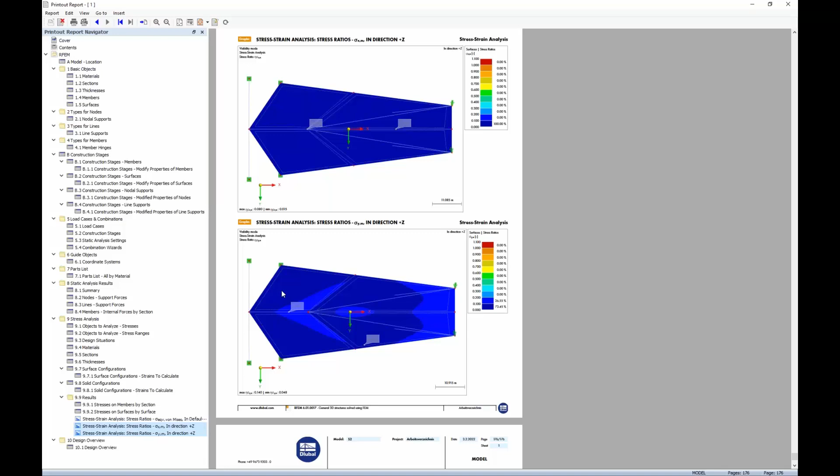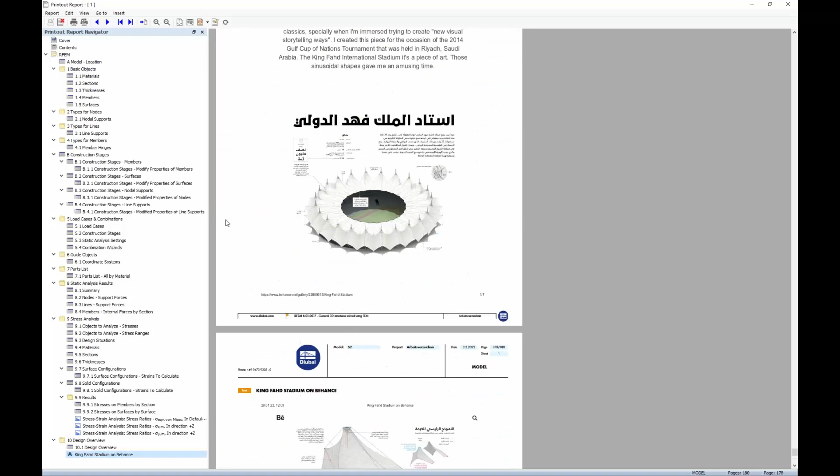To round it up, finally you could be forced to make some description of your structure, and if you have some prepared PDFs or whatever, you can read it in. Go to insert PDF, go to my folder for webinar. I have a PDF of the website from Antonio Farrer about this stadium in Riyadh. We can bring it in by one click, and you have it imported. It's not a bottleneck regarding performance, so you can also still work with this report, jump to different positions, and create a final documentation for your clients.

So maybe this was one workflow how to work with the program to create shapes based on other shapes. Now maybe we can think about how to finalize all this analysis. For this, a look into the load case list is important, because we only did basic checks on this small 15-degree segment, but to do a full analysis you also have to consider wind loads.

Wind loads for this type of structure is not so easy, because we have no concept of how the load distribution looks like, and therefore the question comes up how big the loads from wind are. You can solve it by a real wind tunnel test, or what we can offer, you can place your structure in a numerical wind tunnel.

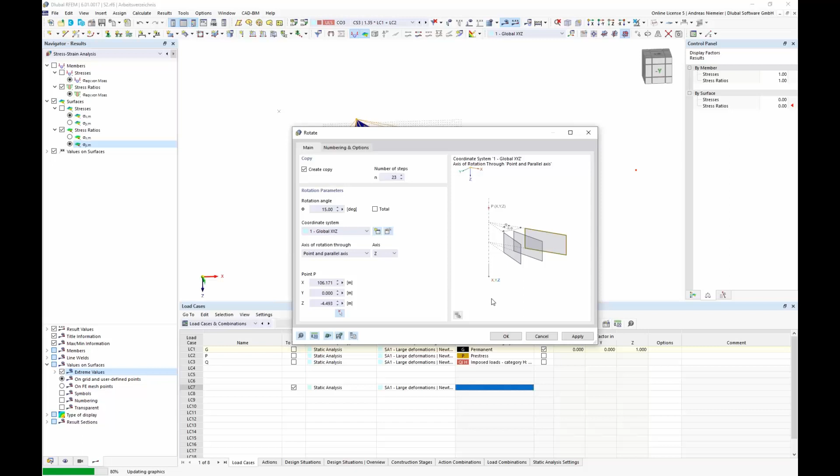For this, you need a full model, not only a 15-degree segment. So you can say please take this structure and rotate it by 15 degrees around the center with 23 steps, and confirm this setting. You will see that it's not a big deal to create such a big stadium model, because if you modeled your structure system quite clearly, it's no big deal to combine it into a bigger model. Even the stages topic, all this is not so critical.

Now if you have such a model, you can place it completely in a numerical wind tunnel. Because this takes some calculation time, I prepared a model for you. So I jump now into another RFEM and move it here on this side. This is the same, almost the same structure, even with these stages we just discussed.

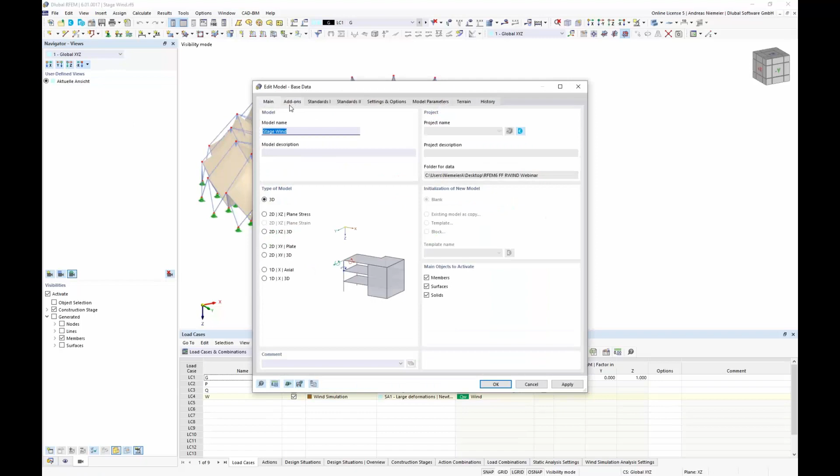The main difference is that I created here a wind load case. This wind load case, as you see in analysis type, has a different flag. This different flag comes because in add-ons the wind simulation is also activated. If you activate the wind simulation, you get the option to define in analysis type wind simulation. This opens two new registers.

You can say please use this model with this stage and this shape for a wind simulation in a numerical wind tunnel, where the wind medium is according to this density, kinematic viscosity, turbulence model and meshing, with this wind profile, which could be user-defined in a table or according to any standards. The wind is coming from this angular direction. So here you specify the medium around the model, the input wind speed, and the size of the wind tunnel.

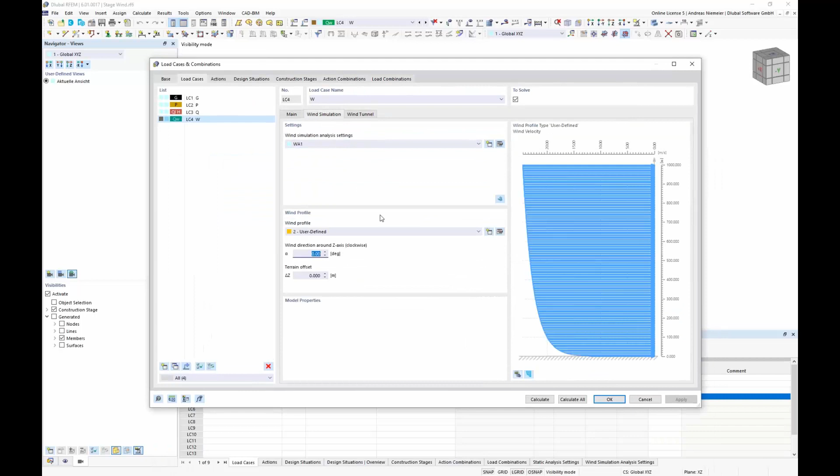If you calculate this load case, this is a two-step process, meaning the program moves the model in the background into a numerical wind tunnel according to all defined settings, calculating the wind medium around the model. Let's take a look. You see it calculating here, this is the numerical wind tunnel structure. You see the wind tunnel with input window, and now the process is detecting the pressure around the structure.

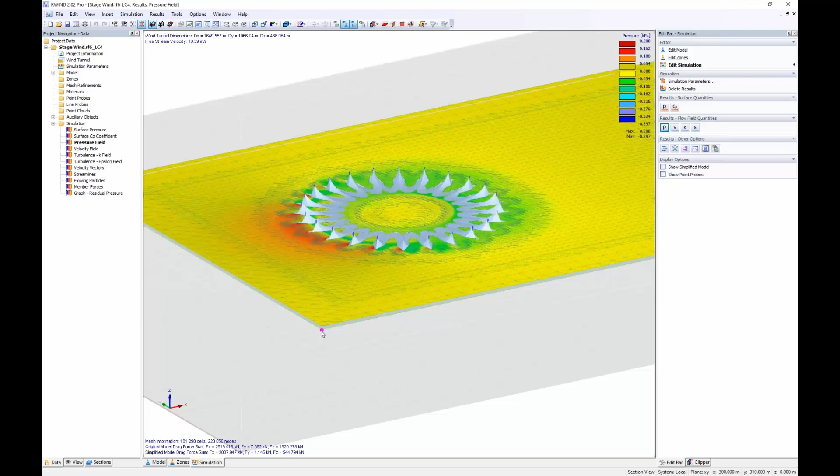Now this is only maybe a slice of it, but you can see how the pressure is changing. You can also say, please show me results in this slice. It calculates the wind velocity around the structure and even the wind's direction. So, with this information, the wind flow for the structure could be detected.

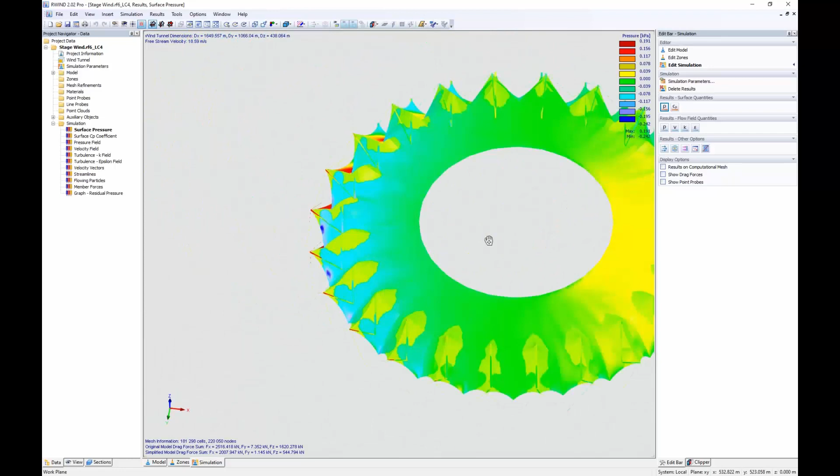And according to this information, the program can calculate the pressure on the structure. You see, if it's updated, that we have here in front some pressure, here some suction or below. How to see even in the back suction. So all this influence is given then.

And these forces, these pressures are given back to RFEM, to this load case with wind analysis, and could be used or are used for a subsequent static analysis. This is a two-step calculation what I just mentioned, and leads to the situation that you can, it's running.

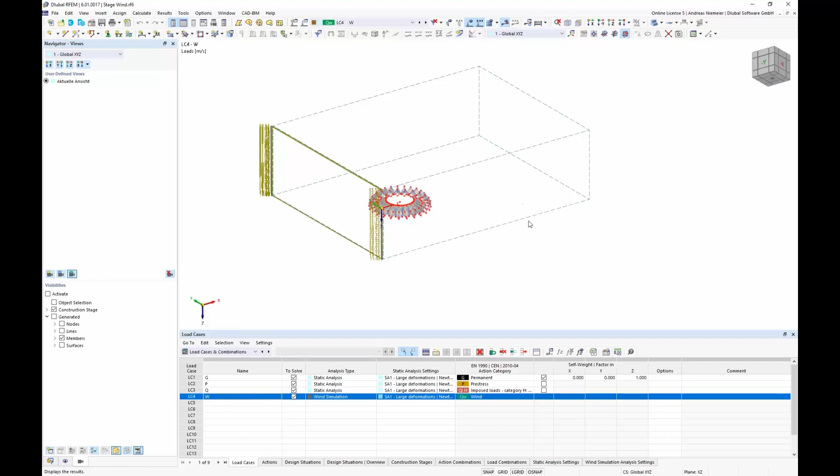Can detect for these forces, new internal forces in this structure. Now it's ready, and you see, if I activate the loads, this is maybe the wind tunnel. If we show everything, you see this is the input wind speed like we just saw for 0 degree in X. And now if I activate forces, you see also this is now the structure's answer of the wind simulation with the loads that wind simulation calculated on the structure.

Here we have, for example, the internal forces, normal axial forces. Maybe only I rotated that we have now, exactly. And even we get deflections on the structure. All this feedback of the structure is now given according to these loads.

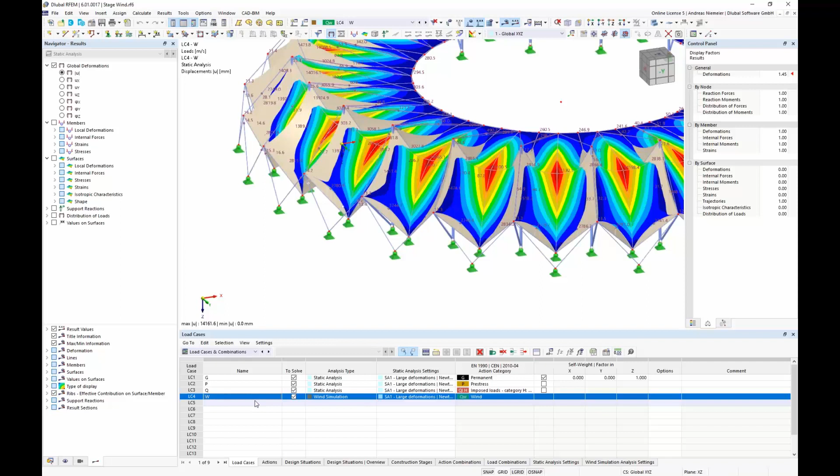And now with this information and this real load distribution of wind load, you can go ahead like I just showed you before. You can start combination of these loads, calculate maybe loads for your ultimate limit state and serviceability state, and feed it into these design add-ons, for example stress strain or steel design, as you have to do according to the rules of the building codes. And this brings me now to the end of my webinar, and I give back to Andreas.